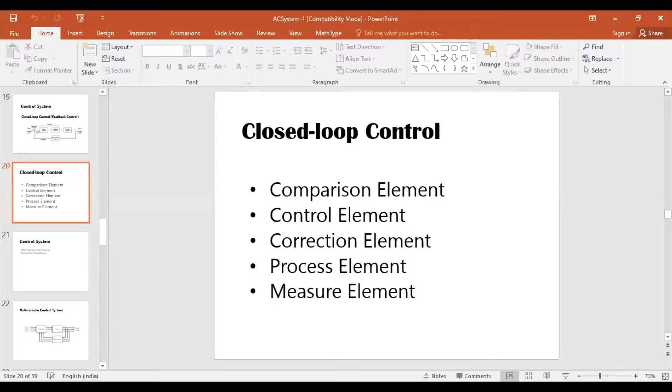Example in the domain of autonomous vehicles. So yesterday we studied the idea of open loop and closed loop control systems, and the elements of open loop and closed loop control system, a simple block diagram, and various components of a control system, right from sensor to the controller.

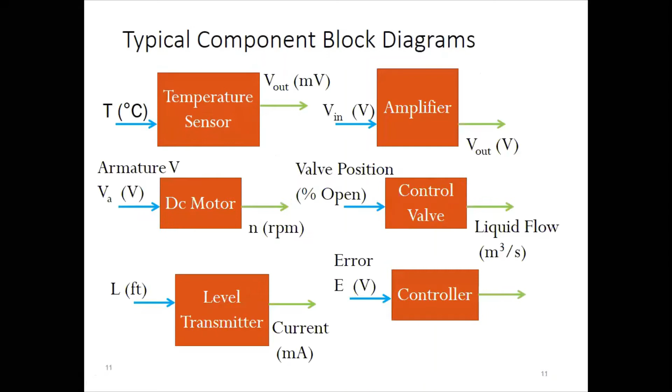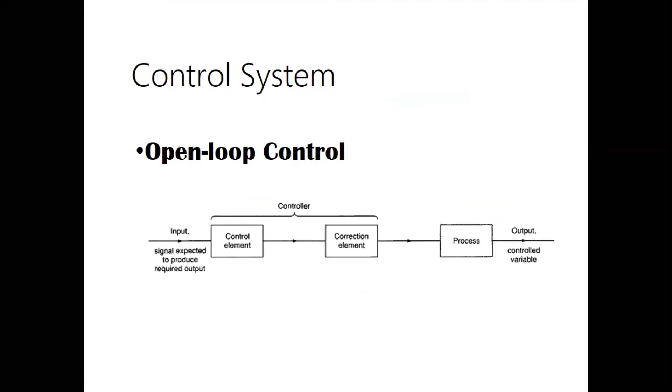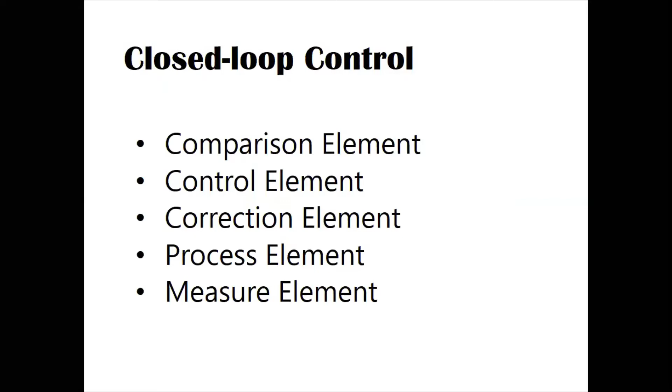So with this knowledge of control system, we'll proceed further to know the different elements of closed loop control. So we have discussed about comparison element, control element, correction element, process element, which is nothing but plant, and measuring element or measurement element, which is nothing but sensor.

So the control systems can again be classified as single input, single output system, or SISO systems, and multivariable control system, which is nothing but multi-input, multi-output system. So we have seen an example of water level maintaining in a tank, where we understood there was only one input and one output.

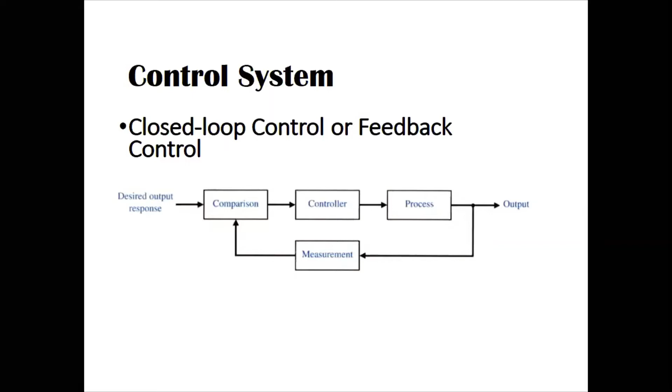Fine, we are discussing about single input, single output systems and multi-input, multi-output system. So considering the example of water level maintaining in a tank, given a reference input, there is an input valve and an output valve. So we have only an input parameter, which is nothing but the volume of water coming in, so it is a single input. And the water going out, the volume of water going out of the tank, is another parameter, which is nothing but single output. So we can call it a single input, single output system.

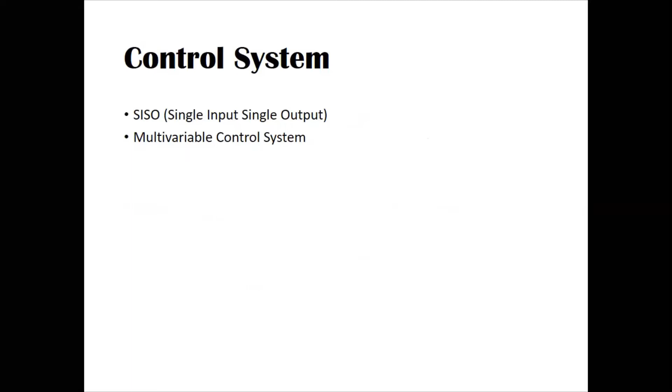So a single input, single output system can be either open loop or closed loop, it depends, but the thing is there exists only one input, one output. Now let us look into multi-input and multi-output, or multivariable control system. Many practical things in the real world are multivariable control system type.

One is the pedaling force, another is the direction, and another is applying brakes whenever necessary. So applying pedaling force and giving the desired direction are basically like instantaneous desired inputs, or set points, we can say, since the desired direction keeps changing as you move towards your destination or target. So they are also called set point inputs, but to be precise, we can call them instantaneous set points or instantaneous reference points.

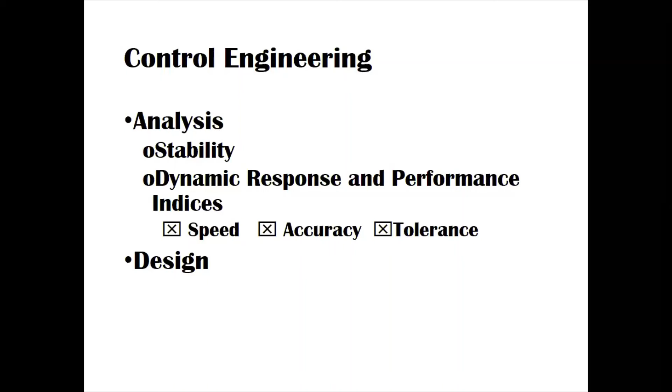The challenges in engineering design are obtaining the specifications and understanding the complexity of design. Then trade-off. Trade-off is a technical terminology; it is more or less related to what you can compromise with. Do you want to compromise with stability, or do you want to compromise with accuracy?

Next, design gaps, then risk, then optimize the parameters. Design gaps is fine, you can understand. Risk is also fine, you can understand. Optimize the parameters is a key word. Optimal has a unique meaning. Optimal, in this sense, is not always minimum actually.

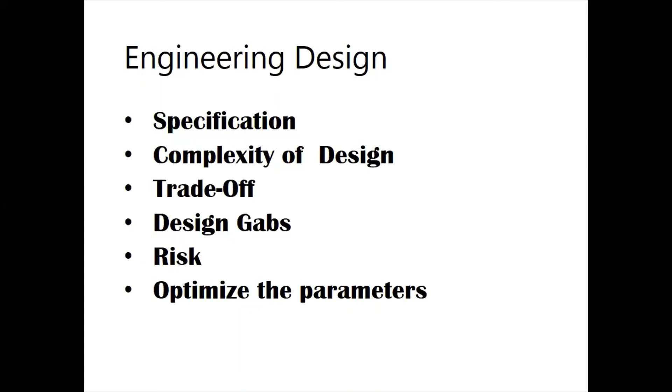It's like suppose you have an objective: your bike should reach from source to destination with minimum energy consumption, minimum fuel consumption. If that is your objective, then whatever design you end up with is called the optimal solution or optimal design. So the word optimal has different meanings in different scenarios.

So this is one simplest control system, no need to explain much. You have a turntable speed control, which is an example of open loop. You have a DC amplifier and a DC motor. The battery is operated through the amplifier to control the speed, and the respective block diagram is given here. Desired speed you will define yourself, then that desired speed will be converted into appropriate voltage, which is fed to the DC amplifier, then DC motor, then turntable.

Somebody had asked me the difference between process and actuator, plant and actuator. You can clearly see the difference here: the process is the table, the turntable; the actuator is the DC motor. But when you consider this as a whole system, then the DC motor you can term as a subsystem.

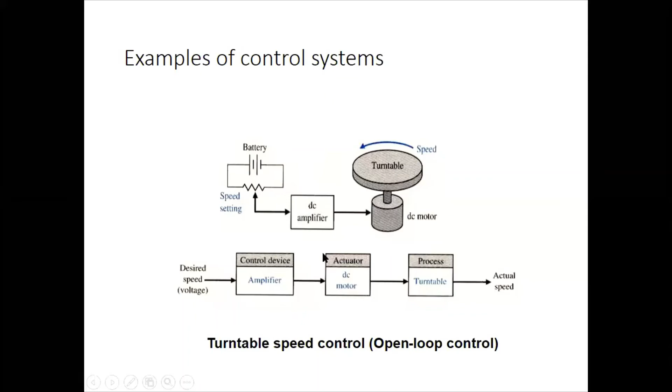So I repeat again, there is a difference between system, process, plant, and actuator. I have already explained this, so you can refer anything if you want. So the control device is the amplifier.

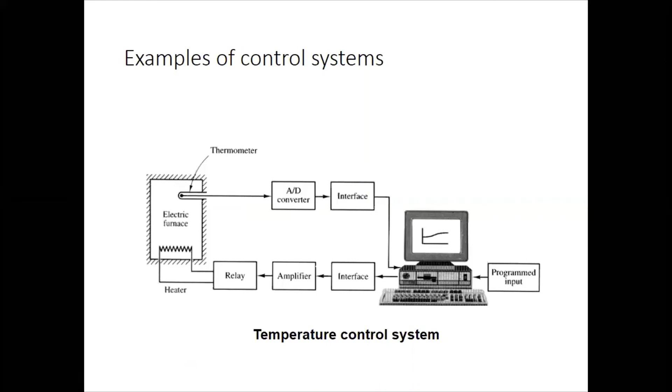Then temperature control system. Somebody had given air conditioning as a closed loop control, and the similar thing is being explained here. But the key blocks are A to D converter, interfacing to the computer, then operating the heater through relay. Relay is actuated using amplifier level. So that's how a basic block diagram looks like.

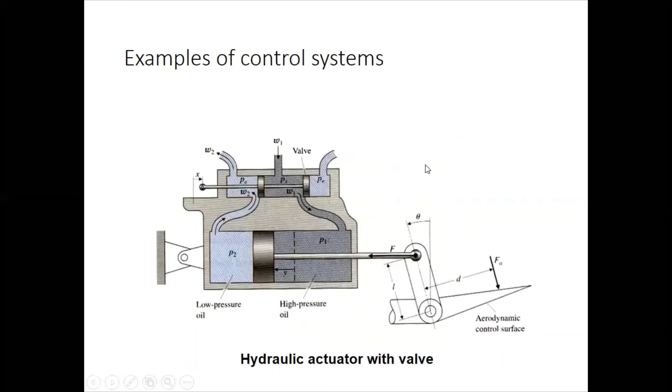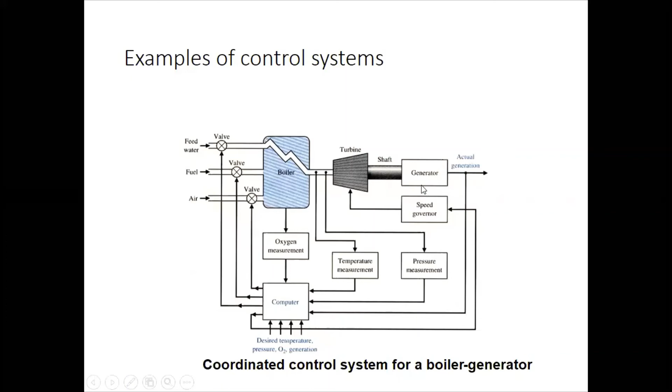multi-output, or sorry, multi-input single output. We can call it MISO. Example: this is a coordinated control system for boiler generator. Let us not look into the operation here.

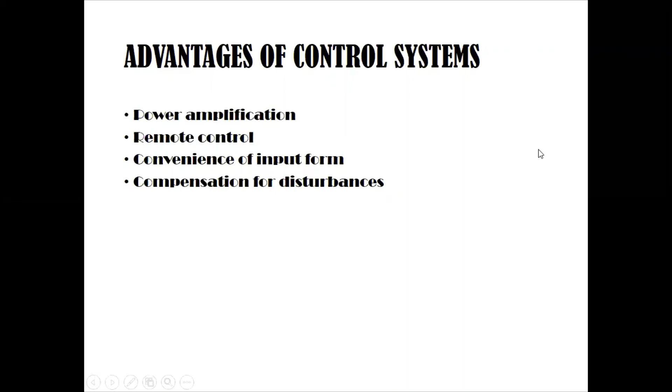So the basic advantages you might guess very easily now, that a good control system will always take care of all these parameters.

So this is some theory part, not required. Okay, so one final simple sentence to define the advantages of a control system: the system must be able to yield the correct output even with a disturbance or noise. That's it. A good control system is the one which will operate or behave properly even with a disturbance or noise.

So you ride your bike from home to college, even though there is so much traffic on the road, so many noises, so many disturbances. So you have a very good control system, or a very good brain. And if you get diverted because of disturbance and noise, then I think you will have to check your brain.

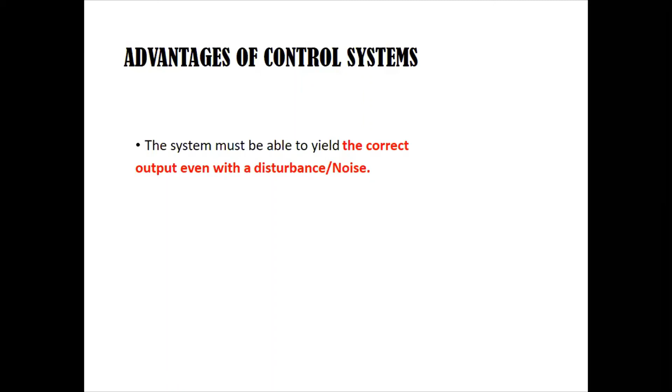Okay, the design process goes like this. This is related to the flow of control system study in this semester. First we need to get the idea of physical parameters in the system and transform them into a mathematical equation. Then you need to convert that into a block diagram to understand the flow of signal. Then create a schematic for that, and then develop a mathematical model for that.

Then the block diagram will be reduced to the simplest level. Then you analyze the parameters, then go for the design. So what I mean is, reduce the block diagram. We have seen small block diagrams for every element of the system.

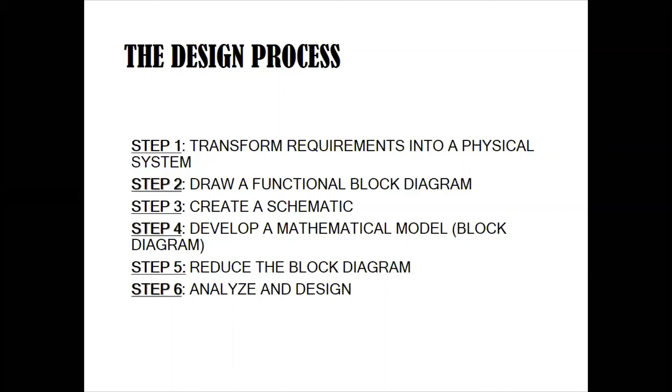So just imagine a scenario: if you draw the block diagrams for the sensors in your body, you will end up with n number of blocks. And if you combine all together, it will be a very complex one. So for that reason, you need to reduce the block diagram to understand further or to analyze further.

Okay, so these are the steps we are going to do in our study. There is some typo here, leave it. Step 1 is to determine the physical system specifications from the requirements. So step 1, step 2, step 3 come under mathematical modeling and block diagram representation, which almost covers chapter 1.

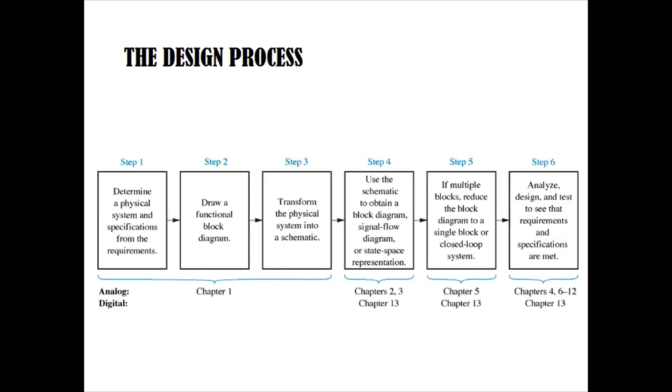Then step 4, we will enter the signal flow diagram, that comes in chapter 2. Then step 5, study the closed loop system and its characteristics, that comes in chapter 5, root locus. Then the last one is analyze the stability and dynamic behavior and so on, to finish the control system.

So that's it about the introduction. I'll wind up today's class with two more simple videos for you to understand, and just one technical paper to give a brief introduction about what kind of research goes on. So here is an example.

Suppose you want to drive your vehicle from source to target. So it starts from here, it will take care of speed, then steering angle, it will take care of the acceleration. So it has reached from the first to the second destination, then from second to third destination. So what goes behind is this program. This is one such example.

Another example: here it's an example of obstacle avoidance. So this is the obstacle, this is your vehicle, and this is the target position. Here was the initial position. So what goes behind, again, is a huge amount of mathematics, which is what all we have studied in the introductory part.

Sorry, I think you did not see the video, right?

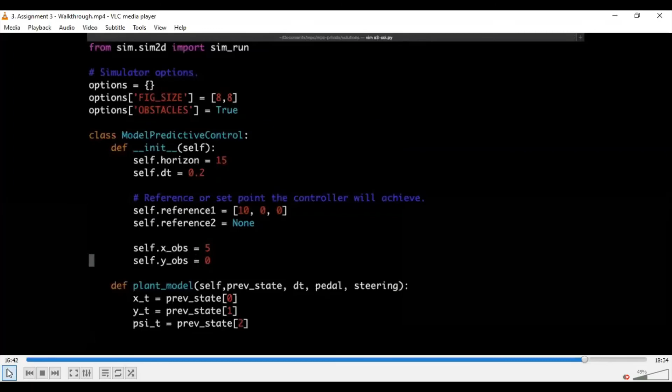Okay, can see the video now.

Yes, so start position to end position. This is an obstacle avoidance example. So there is one program. So steering and acceleration are controlled in parallel. A lot of mathematics goes behind this.

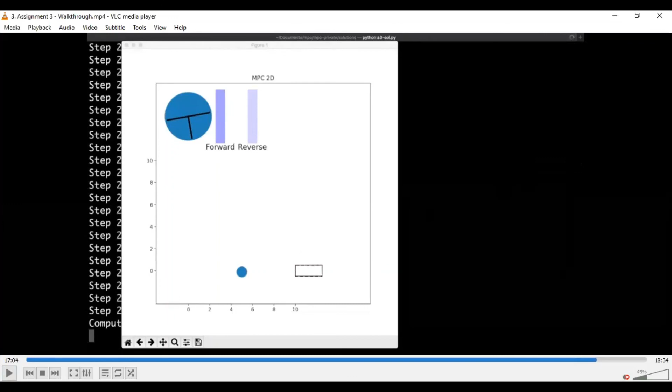This is an example of understanding vehicle parking, automatic vehicle parking, with an additional parameter of avoiding the obstacle. Okay. So this was one such example. Then coming to the last part,

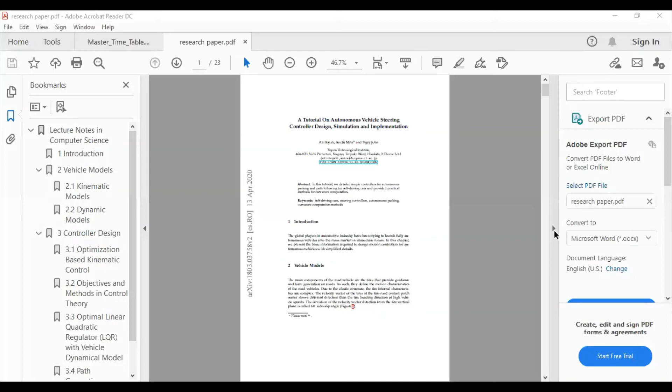here is one article just to show you how the flow of research or applications goes in control system. There is one article I found which is nice and interesting for you people. It's a tutorial on autonomous vehicle steering controller design, simulation and implementation. Just understand the philosophy of this paper. No need to get into deeper mathematics.

So here it covers all the aspects of control system: controller design, simulation and implementation. Before controller design comes understanding the system itself, which is the vehicle here. There is a vehicle and they have made it an autonomous vehicle. This autonomous vehicle has a steering controller design. They have developed a steering controller, simulated and implemented it. So just look into the flow.

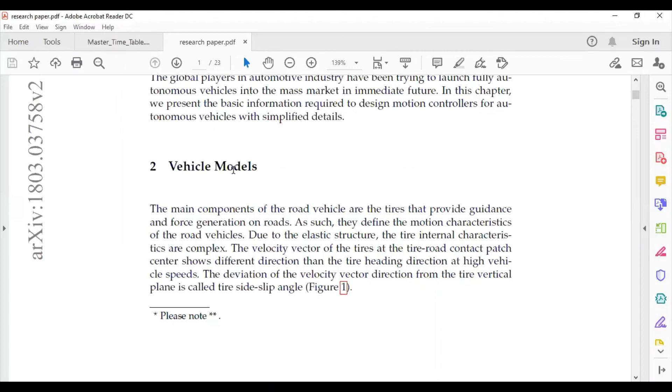The first step itself is about the vehicle model. You need to arrive at some mathematical definitions for that system. If you have a mass object and I ask you to get its mathematical form, you can easily say force equals mass into acceleration is a mathematical equation related to it. That's meant by vehicle model.

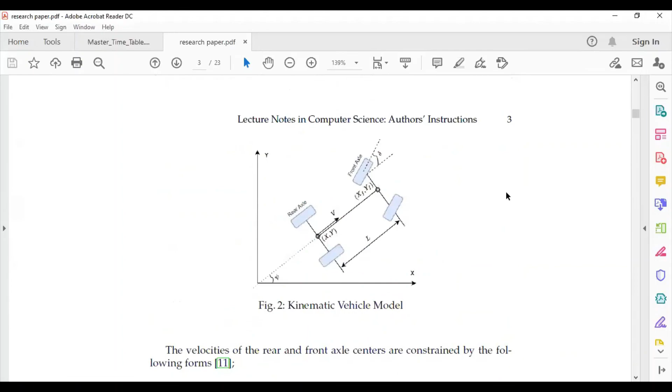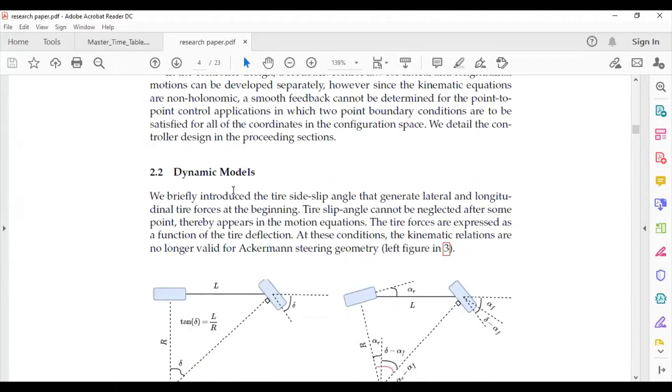Then they have gone to a set of diagrams and models. They have got a kinematic model and written equations related to the model of the system, ending with a set of equations that defines the kinematic model. Then there comes a dynamic model. Since it is a vehicle, there are two types of modeling: one is kinematic and one is dynamic.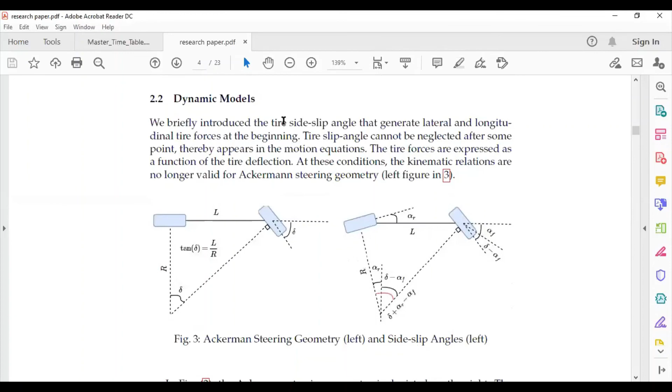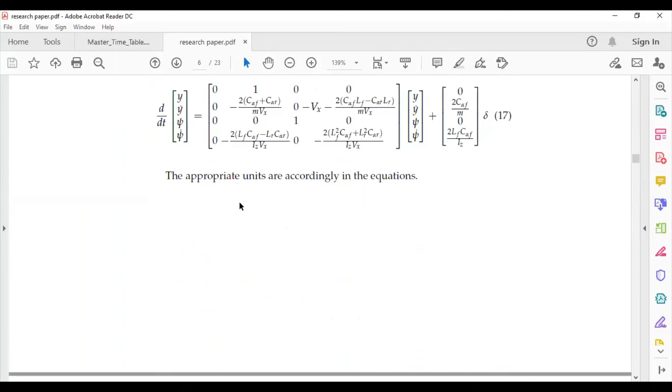But in conventional control system, there is only unique modeling. For the sake of understanding, just go through this. They have made some modifications and assumptions to reduce the complexity of modeling. And finally, they also have arrived at a model, a set of equations. So this part covers the mathematical model of the system.

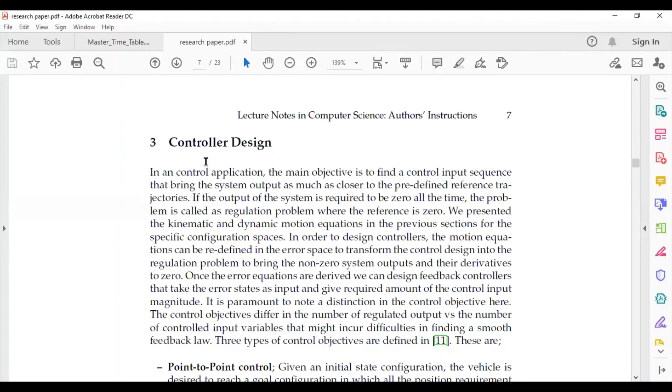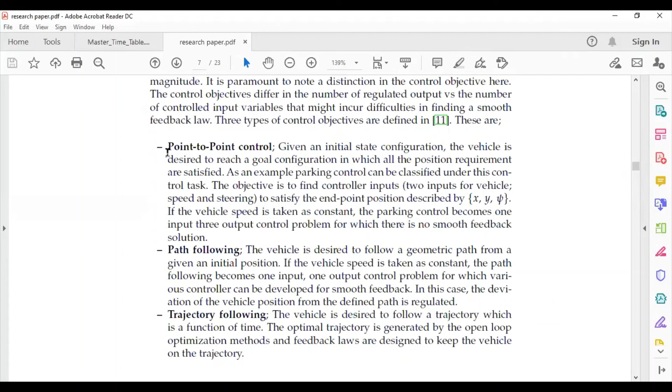Once they finish off with the mathematical design, they go ahead with controller design. While making the controller design, they define specifications or objectives themselves. There may be n number of objectives when you want to design a controller. There is no unique one. More parameters, more objectives is not a good approach. Fewer objectives is also not a good approach. Optimal objectives are a very good approach.

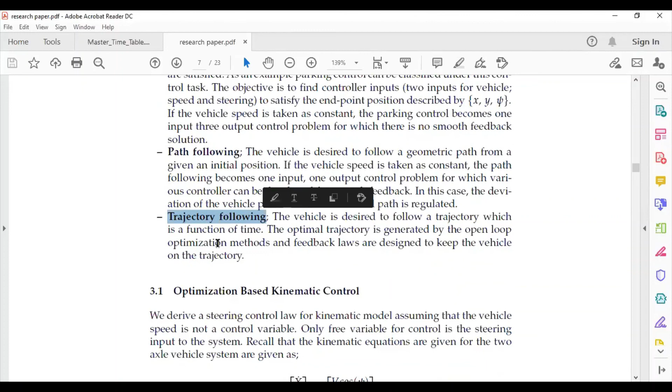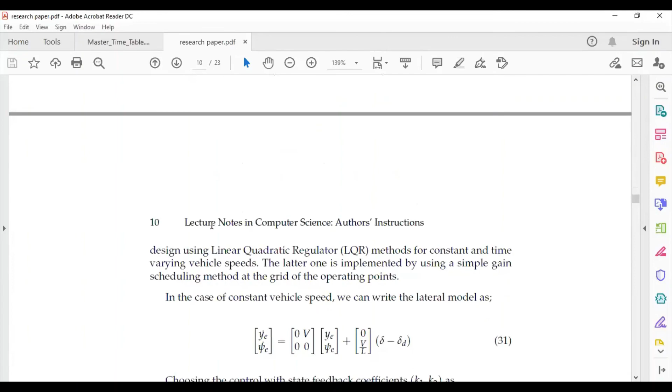So point to point control is one objective they are targeting. Path following is one, and trajectory following is one. Trajectory following and path following are different; we'll understand as we proceed. With these three objectives, they started the controller design. So many calculations, assumptions, minimizations, all those things are done here.

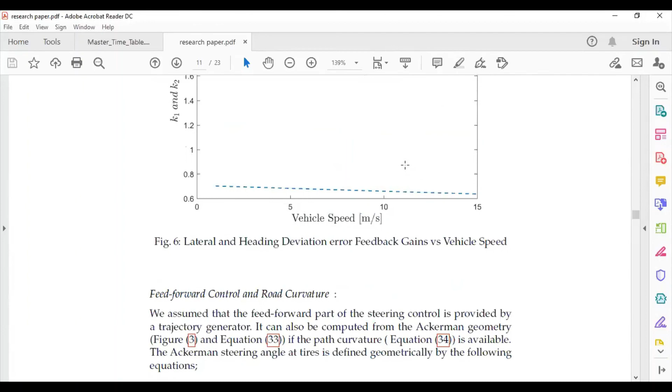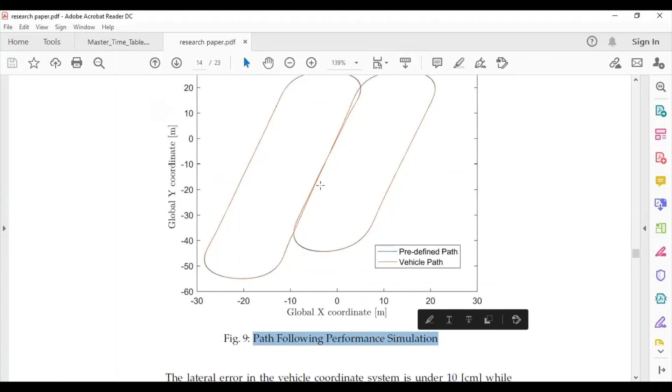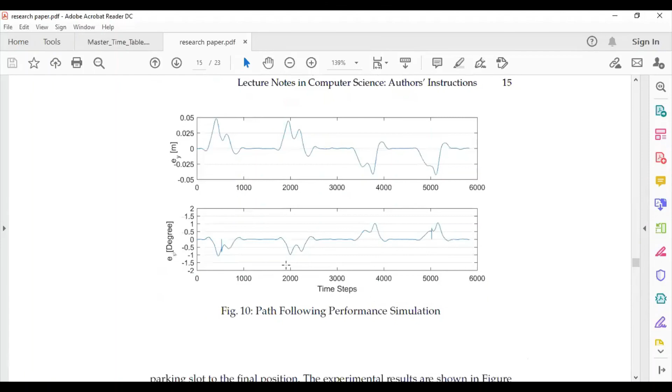Here it is degree. Okay, here it is a tight parking experiment. It's very much essential in India. Heading angle error and lateral tracking, all these parameters are represented graphically.

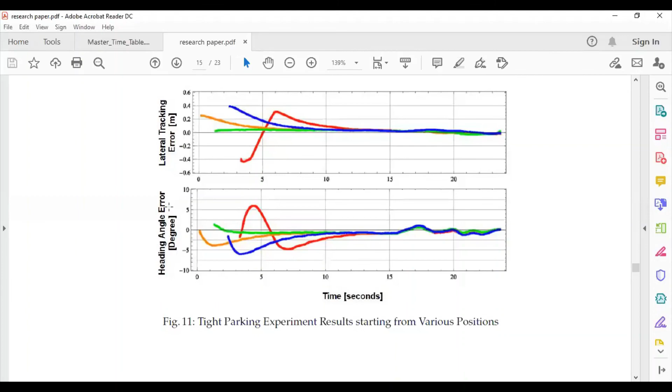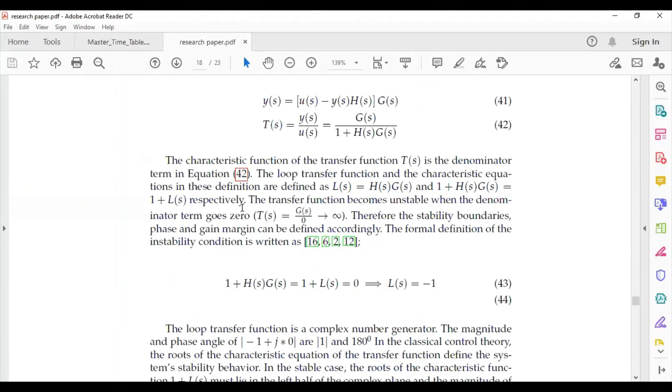So with this, he has finished everything, and before implementation, he has explained some basic concepts and made some calculations for, say, GM and PM. You can see here, which we are studying in our control theory. It is to show the extent of stability.

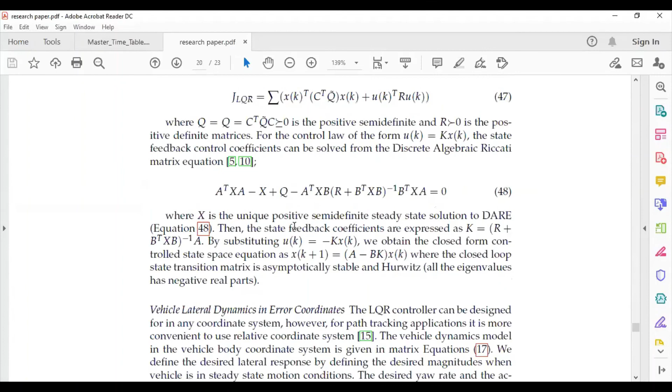Okay, fine. With this, we are winding up the introductory part, and we are concluding the introduction. So that's it.